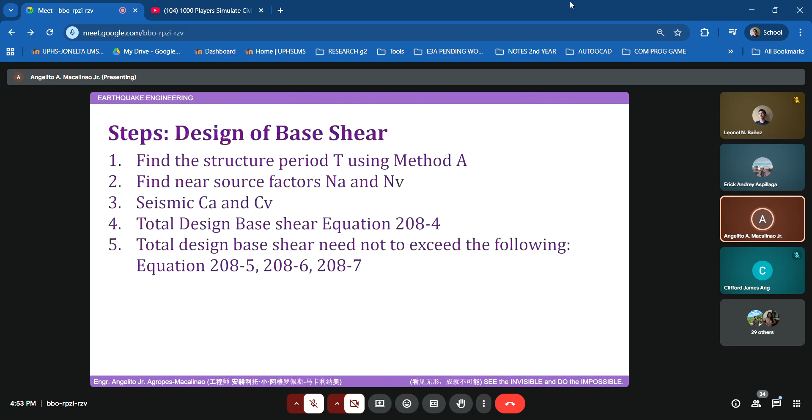Okay, thank you so much Mr. Aspilaga. So the value of NA, as established based on Table 208-5, is equivalent to 1.0.

And the value of Nv, according to Table 208-6 based on the interpretation, is 1.2. And the CA, referring to Table 208-7, is 0.44 times NA, which has a value of 1. So therefore the value of CA is 0.44.

Also, the value of CV in accordance with Table 208-8, based on the interpretation, is 0.64 multiplied by NV. Substituting the numerical values: 0.64 times 1.2, resulting in a final value of CV of 0.768.

Okay, another parameter we need to establish before assessing the lateral forces per floor is the numerical coefficient for period. You may refer to NSCP Table 208-11A.

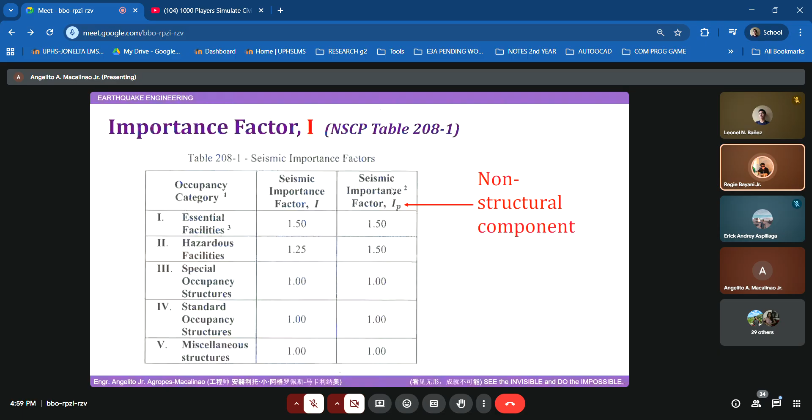And how about the other portion? Do we have any more 8.5 values? No, those are the only two. Okay, so please enlighten us which of those two will dictate the specific value of R.

It's category C, sir. Category C. So again, what's our basis? The special reinforced concrete moment frames, sir. That was given to us in the problem statement. Also, for the dual system, there's no data given to us about concrete shear walls, so we fall under category C, bullet 1, which is special reinforced concrete moment frames, with the value of R being 8.5. Thank you, Mr. Bayani. So the value is 8.5.

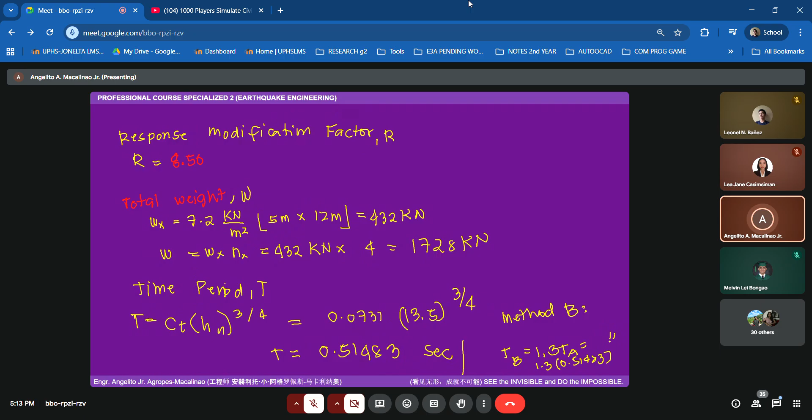Ano po, 0.6692828. Okay, so we have two method, di ba?

Based on the NSCP, method A, method B. Dito, nakakuha tayo class ng 0.51483, and then yung time B naman is simply equal sa 0.66928. Take note class, we are given the structure period, which is, ang value niya ay 1 second.

Ang ibig sabihin ng structure period, dapat i-compare mo siya sa method A and method B. So let's say for example, pipili ka ngayon from method A and method B, pipili ka ng mas malaki. So mas critical yon. Ang magiging pipiliin mo ngayon dito, use mo yung time B, which is 0.66928.

And then check mo ngayon siya doon sa binigay sa atin na structural period or time, which is equal sa 1 second. Dapat daw, pag yung napili mo na time, hindi daw siya dapat lalagpas sa 1 second. So therefore, ang pipiliin mo dito ay time B, which is equal sa 0.66928. Okay, so yan yung process.

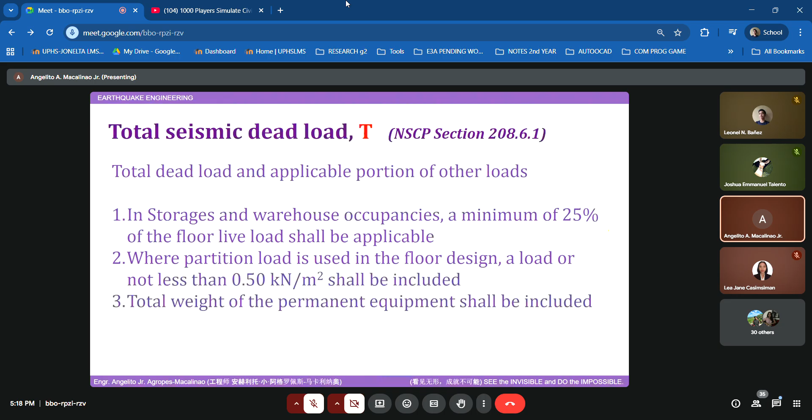Thank you. For this particular, take note that the given data natin is structure period. Ibig sabihin ng structure period, 1 second. At yung binabanggit natin o yung terminologies na binigay natin dito class, ang ginamit natin na term dito is elastic fundamental period.

So magkaiba ang elastic at saka yung structural period. Pag sinabing structural period, kung babasahin niyo yung book na binigay ko, it refers doon sa responses maximum. Kaya yung code, i-apply mo siya ngayon itong portion na to. Yung structural period, it refers to the maximum behavior ng structure na gagalaw siya based on the theory.

At saka i-apply yung code, dito na papasok si method A and method B. I am expecting kasi na iti-treat si method A kaagad. Hindi ko naman din naisip, ngayon ko lang din naisip na 1 second pala yung nagamit ng iba, kasi yung iba may gumamit na TA kaagad. Kaya sabi ko, yung TA is... hindi ko kasi tiningnan yung name nyo nung chinecheck ko kung sino yung mga gumamit ng 1 at saka gumamit ng TA.

So anyway, for the records, I will consider the time as 1 second, but also please take into consideration for the preliminary examination that the structural period refers to the maximum behavioral na magiging movement ng ating structure, theoretical, and then we need to check sa code kung yun ba ay papasa. Using the code, we have method A, which I presented and gave an example assessment during our lecture, which can be computed using this formula. Right after, yung challenge ko sana sa interim is to test yung method B, which hindi din pala siya talaga nangyari, parang naka-pattern buo doon sa example.

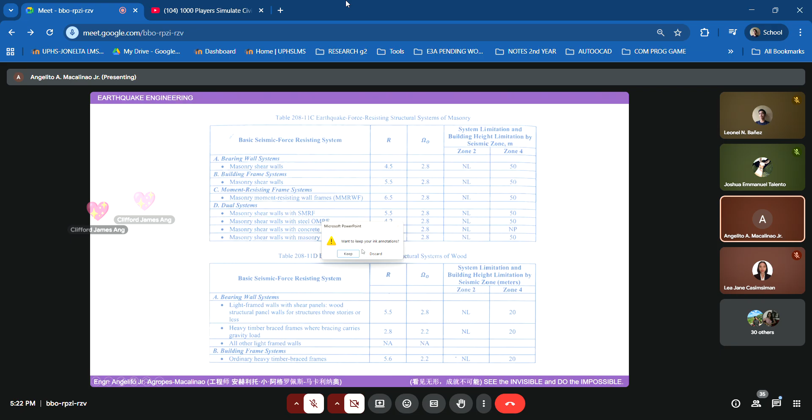So after nating ma-set yung time, na-set na natin yung time, pipili na tayo. Assuming na I will continue na lang yung lecture as na nakapili, moving on na tayo sa interim. I will consider the 1 second and then the TA. No worries for that, okay lang din naman sa akin yon. Now, proceed tayo as original ngayon.

So ngayon, may 1 second tayo na structural period, and then yung napili natin sa TA and then TB is 0.669. Kinumpare natin sa 1 second, mas malaki pa rin naman yung 1 second, hindi tayo nag-over. So therefore, yung magiging value ng T natin ngayon is 0.66928. Okay? So yan na yung mapipili natin ngayon na value ng T natin.

Okay, so the next consideration naman natin is kailangan na nating isolve yung value ng kanyang shear. So yung shear natin, we have also provision. Ilalagay ko lang ulit dito. So yung value ng V natin ngayon or shear natin ay referred dito sa 208.5. So tatlo yan, ngayon ang pipiliin lang o ang gagamitin lang natin para hindi ganun nakakomplikado ay yung Vmax and then Vmin.

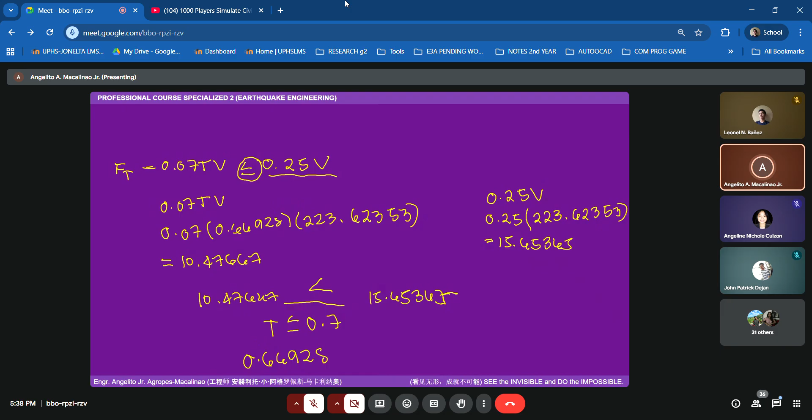So yung T natin, dapat tingnan natin kung masasatisfy na to, or equal daw siya sa 0.7. So yung T na ginamit natin ngayon dito is equal siya sa, asan na yun? 0.66928. Na-meet ba natin ito, Dejan? Yes po. Okay, kung na-meet natin ito, ano yung sinasabi ng code sa atin?

Ang magiging value daw ng ating FTI? Ilan? Yung magiging value ng FT natin? From the proof, pabalik sa calculated natin. So ano yung magiging value ng FT natin ngayon? Yung 10.47 po. Bakit? Kasi na-meet niya po yung condition.

Okay, ibabalik ko dito sa ating provision, para matuto magbasa ng mga provision. So kung na-meet natin yung FT, which is equal to 0.07 TV, which is dapat less than siya sa 0.25, na-satisfy natin, yes. Yung T din natin is 0.66928 something, and na-meet din yung condition ng 0.70. Okay, so uulitin ko yung tanong, ano yung magiging value dapat ng FT based on the readings on the code?

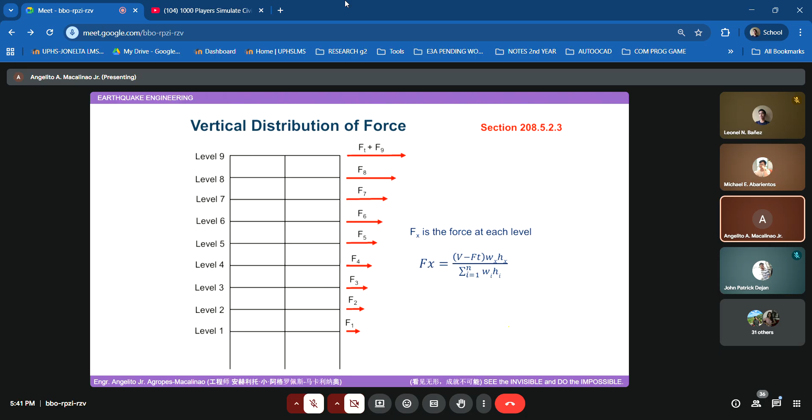Sa rinig po, naririnig naman po, may concern lang po ako. Sige. Yung dun po sa final slides niyo po, pwedeng pabalik po.

Ito? Opo. Yung tama naman po, na-meet naman po yung condition. Yung sa lang po, mali po yata yung computation po, dun po sa 0.25 times yung V po. Dapat po kasi po yun,

55.90588 po. 55. Okay, 55. Ito yung, sorry. So, ang mako-correct ay ito, magiging 55, wait lang, nakalimutan ko. 55, wait. 90588 po. 90588, ganyan. Opo, sir.

Pa-double check nyo na lang kasi ako is wala ngayon dito correction na dala-dala. And even dito, kanina din, ang dami nilang correction dito. So, please double check nyo na lang siya, kasi on the spot din ako nagsosolve.

So, ilagay ko lang tong table form para mas mabilis tayo mag-establish. Okay, so let us begin to establish now, no?

So, meron tayong 4 na layer. So, sabi natin, ni-label natin na roof deck. Ito naman pag label class, it's up to you kung level 1, 2, 3, 4, okay lang yan. Basta yung figure is magigets ko siya, okay na ako doon. Okay? So, roof deck.

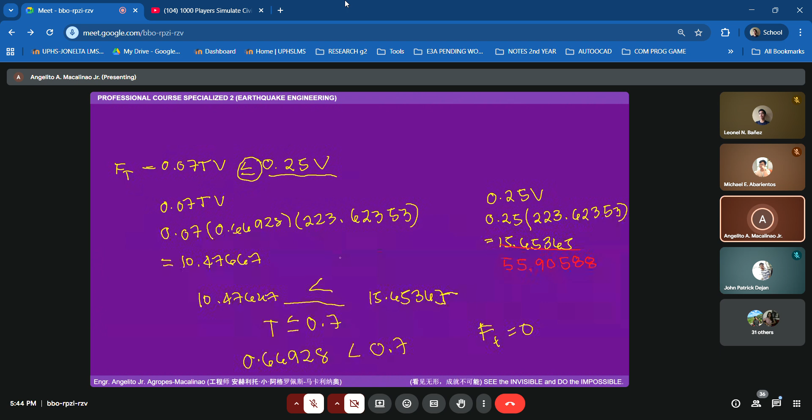Tapos kasunod dito, i-drawing ko na lang din. So dito naman, ma-minus mo lang yung 3 again, magiging 10.5 tayo. Tapos itong level naman na to class, ma-minus mo ulit yung 3, so magiging 7.5. Tapos ito naman is magiging 4.5. Okay, so yan yung mga dimension natin. Idadala ko lang ulit sa table natin: 13.5, tapos 10.5, tapos 7.5, and then 4.5. Okay, and then yung WX naman natin, kung babalikan natin yung problem, yan yung weight per structure.

7.2, tapos yung dimension natin, 5 taka 12. Kaya ako pinasegregate kanina para itong 432, ito yung per floor niya. Okay, so therefore yung 432 na to, ito ngayon yung gagamitin o i-input natin dito na WX. So ito ngayon ay magiging 432, 432, 432, and then 432.

Okay, i-multiply na lang natin to class yung WX and then X, yung values dito ipaki-multiply po dito isa-isa. So saan tayo nagtapos, kay Dejan no? Dolleton, pa-provide naman po noong WX, HX, from roof deck to second floor. Sir, 432 po yung WX. 432. Okay, so please use 432 on your calculation. Okay, so proceed.

5,832. Sa roof deck ba to? Yes po sir, roof deck po. So 5,832. Sakto? Yes po. Okay, so next sa fourth floor. 4,536 po. And then sa third floor, 3,240. And then yung second floor, 1,944.

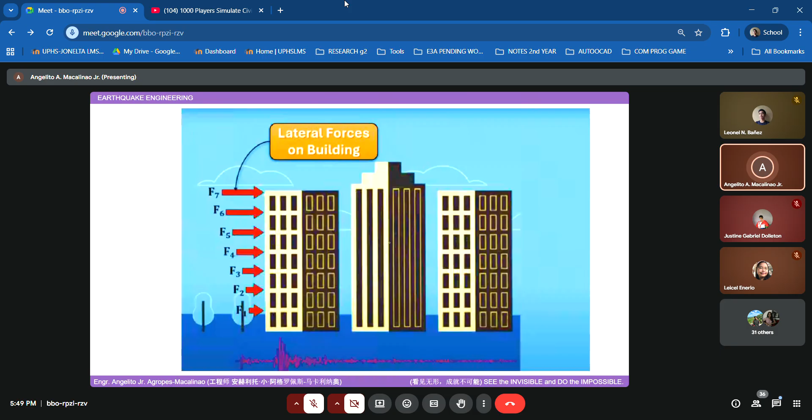So next is calculate natin yung value ng fx. Yung value class ng fx, nasa saan yung fx natin? Yung equivalent value ng ating fx ay eto. Okay, so yung value ng fx natin can be calculated using the V kung ano yung napili natin, and then ft. Tapos yung nasa top floor, ipa-plus lang natin yung value ng ft. So since 0 tayo, hindi na tayo mag-plus for this particular. Okay, i-rewrite ko na lang siya dito. Tapos susundan ninyo kung sino man yung maa-assign na magka-calculate.

So again, yung value ng V natin ay equal sa... yung value ng V natin ay equal sa 223.62353. Sound check. And then yung value naman ng ating ft natin is equals to 0. So yung formula ng fx is simply equal dun sa V minus ft, and then WX HX, tapos yung summation natin ng WI HI. Okay, so pa-compute naman na po tayo.

So actually, kung na-calculate na pala natin ito, i-multiply nyo na lang yung V. Okay, so sino ba na tayo? Kanino na tayo? Enerio Fajardo, so pakibigay naman sa atin yung value from the roof deck up to the second floor. From roof deck po, roof deck. Okay, so for a while muna. Okay, sige, proceed. Sa roof deck po, 83.85, 882.

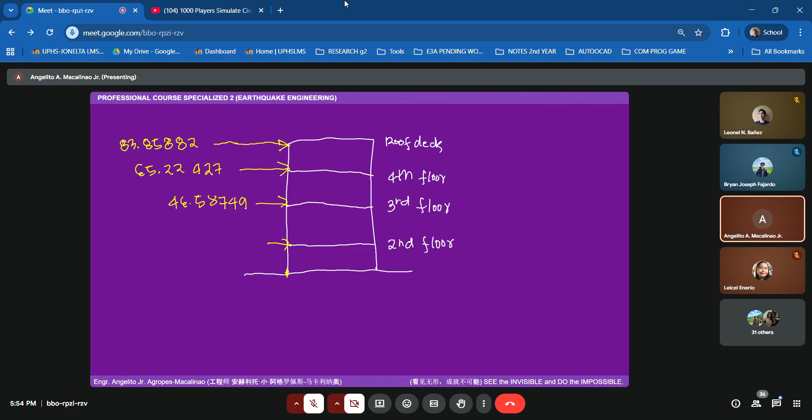So yung values natin sa taas is 83.85, and then 882. Next is 65.22, 427. Next is 46.58, and then 749. Next is 27.95 and then 294.

Okay, so that is now the final answer on the first data na hinihingi, the first requirement na hinihingi sa atin ng design, which is the seismic lateral force per story.

The next is the moment daw at the base of the footing. So pag sinabi naman nating moment, so yung nandito sa portion na to, sabihin natin yung nandito tayo. Okay, it's either dito or dito, so dito na lang natin kunin. So meron daw tayo ditong moment. Kung ito i-consider natin na point A, let's say this one is point B, and this one is point C, point D, sabihin natin ito yung point O natin. Okay, so meron tayo ditong moment O. Okay, so yan yung base ng building natin. At take note also na yung ating dimension

is 4.5, tapos meron tayo na 3, 3, tsaka 3. So kung magsasummation tayo class ng moment at point O, denote positive clockwise. So yung value ngayon ng 83 natin, kung palalakarin natin si 83, papunta siya ngayon kay point O. So ibig sabihin, yung moment natin ngayon ay meron tayong forces na 83.8588 and then yung moment arm natin, yung buo, so that is 13.5 plus

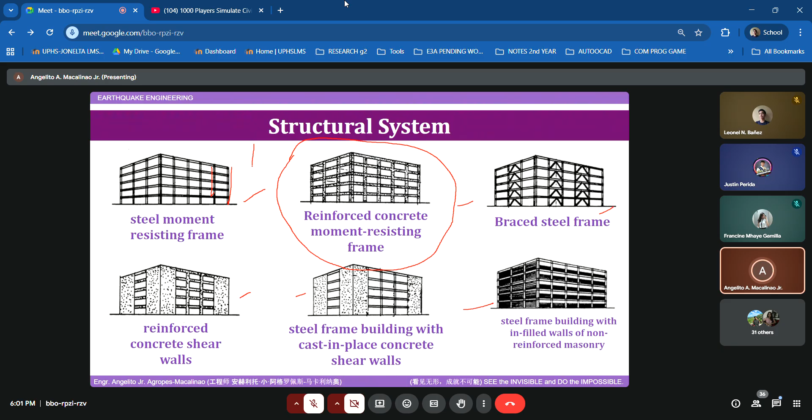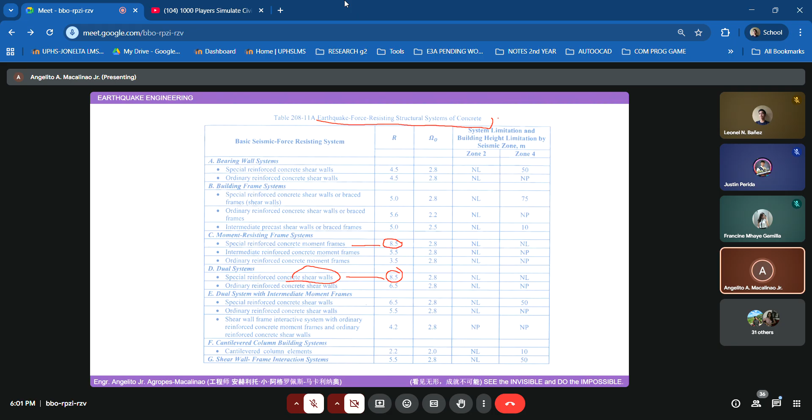So dito sa dalawa, kaya lang ito kasi clearly naman stated na dapat daw yung shear niya is may shear wall. So ibig sabihin, kung ito naman yon, dito kayo pupunta. Eto, asan yung may kon natin? May mga dual system, yung katulad na to. So naka-provide sa inyo, so ito yung magiging basic elements ng configuration. Sa atin, eto lang tayo sa problem, ganito lang yung itsura niya. Based on my understanding, please correct me if may mali sa aking pagkakaunawa. Ayan, so dito nyo titingnan. Itong mga figure na to, mahalaga ito kasi dito kayo magbe-base kung ano yung ma-establish na system, framing system. Sa ngayon kasi ganito pa lang yung binibigay ko, hindi pa naman ako nagbibigay ng mga leveling, yung may mga nakaganyan-ganyan. Okay, so nasagot ko ba yung iyong query kung bakit tayo ay ginamit natin is 8.5 because of the materials of or the whole system is made up of concrete. So hindi po pwedeng magamit yung 208-11B because that is intended for steel.

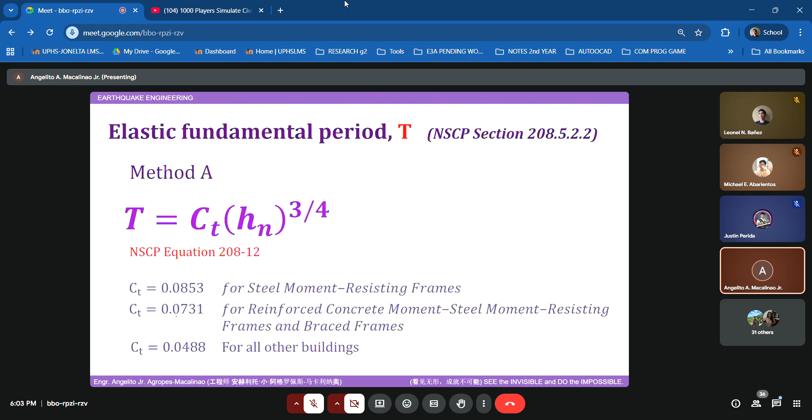Kung kukunin natin yan, sige, let us try to apply this portion, tingnan nyo lang ano yung magiging varying. Kasi ang most critical dyan talaga yung Vmax at saka yung actual V based on experience. So sige, let us try to apply the other Vmin, but on my end, kahit isa lang itong gamitin, okay na ako dito. Ngayon, itong portion ng equation 208-10 is general, can be used using Z is equal to 0.2 and also can be used using 0.4.

Kasi meron siyang pinaka-resistance, ibig sabihin lang, kung yung values, tatlo yan, isang V, isang Vmax, tsaka isang Vmin. So from that three conditions, kailangan yung V na to ay masasatisfy niya ito tsaka ito. Yung sample natin kanina, na-satisfy naman, yung Vmax lang yung hindi, kaya ang napili natin Vmax. Ang next step, Abarientos, is...

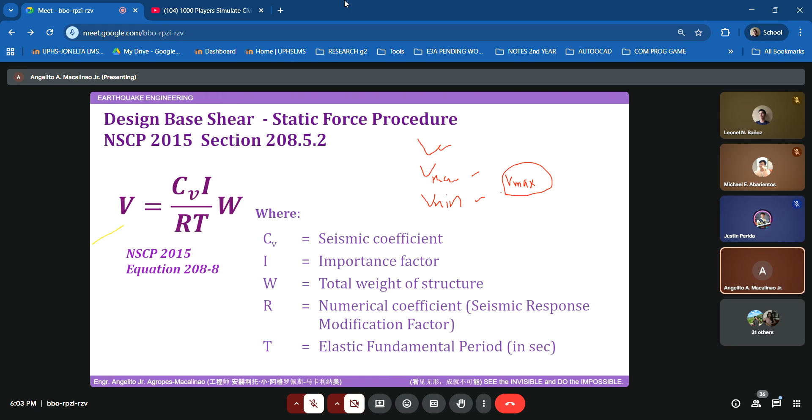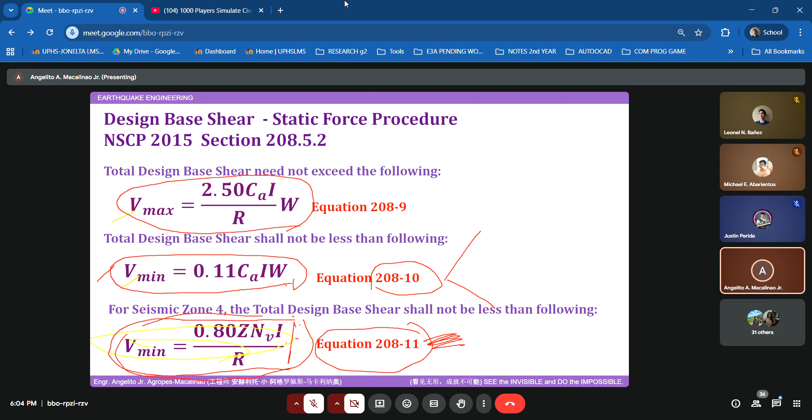Yung Vmax na napili mo, i-compare mo siya ngayon dito sa Vmin na sinasabi dito, kung siya ay naka-zone 4. Kung naka-zone 4 tayo, dapat daw hindi tayo bababa dito. Kaya lang sabi ko nga, around 10% difference lang siya. Pero kung i-compare natin, gamitin natin, for the purpose of doubt, para maalis yung ating doubt.

Gamitin natin siya, idala ko lang doon sa calculation wherein present yung ating V. Ida-double check natin, dapat itong napili natin na to, dapat hindi siya dun magiging less than sa nakuha, which is 0.80 Z N V I natin over R. Kung i-substitute natin siya, 0.80, yung Z natin is 0.4, ang NV natin ilan? 1.2, so 1.2. Tapos yung I natin is 1, tapos i-divide natin siya by 8.5.

So Abarientos, paki-compute nga po ilan yung lalabas sa atin.

Rinig po, sir. Ano po? 78.06494. So ibig sabihin, class, is safe pa rin itong napili natin. Okay, so yun yung interpretation don, Abarientos. Thank you po, sir.

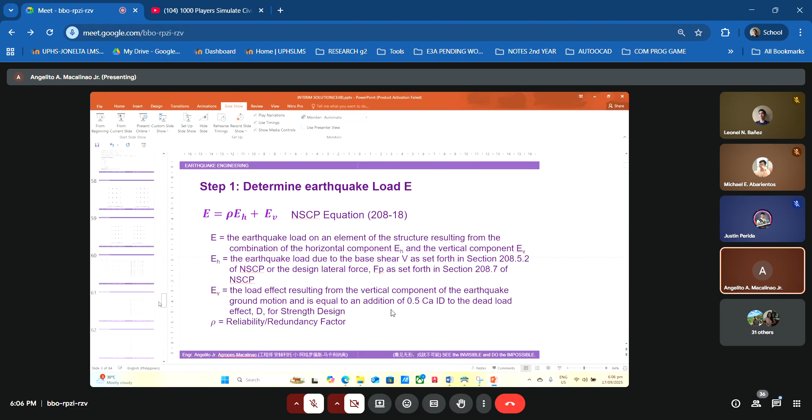So the problem statement number 2, we are given the seismic source type, that is type B, yung zone natin is 4, and then yung nearest fault line natin is 3.5 kilometer. So for this particular problem, we are required to determine the value of CV, CA, NA, and NV. At the same time, yung geotechnical data, daily drilling logs in particular, are also provided. On the daily drilling logs, given dito yung depth, yung coring natin, given din yung number of blows, and then the equivalent N values, and also if it is SPT or core recovery.

So para makuha yon, ginagamit natin yung Atace 2019, which is sabi natin yung value ng VS for clay soil is 47.64 and N160, i-raise natin sa 0.617. To start the calculation, it is suggested na establish muna natin yung kanyang depth versus dun sa kanyang number of blows.

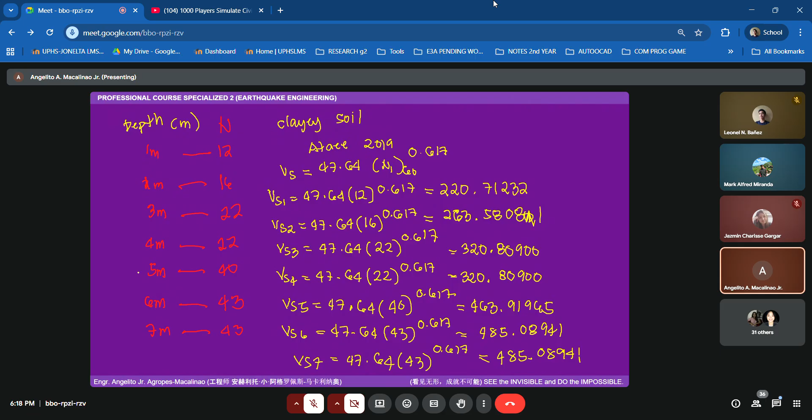Okay, picturean ko lang muna yung mga values. So this is slide. Sir, nasolve mo na kaagad? Wait lang, sulat ka yung DI muna. Yung sa pangalawa, VS2, may correction? 0.58081 po ata. Opo, 081, ganyan. Yan, baka ako mamali. Kala ko na-solve mo, nasulat ko muna. Okay, picturean mo na din, na-picturean mo ba para kung i-advance mo. Opo, so simulan mo na dito. Sound check.

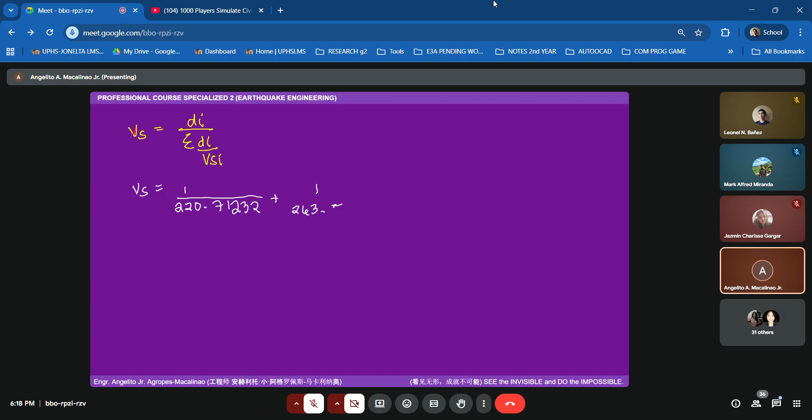So yung VS natin is equal now to, please allow me. Unahin ko lang yung ibaba. So meron kang 1 over 220.71,232 plus 1 over 263.58081 plus 320.80900 and then 1 plus same lang 320.80900 and then plus 463.91965, 1 plus 485.08941 and then 1 plus 485.08941 and then 1. And then over natin lahat yan by 7.

So ilan yung magiging values natin ng VS, Mr. Miranda? 335.935? Point... 934, 04. So, meter per seconds.

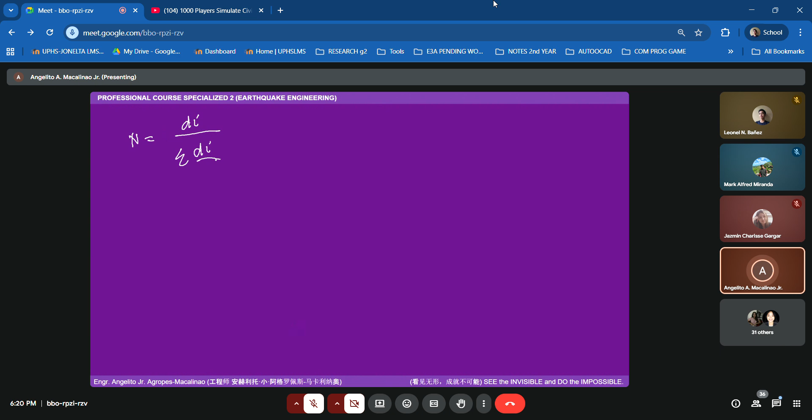Okay, so next naman yung value ng N natin. So sabi natin yung N ay equals to DI over summation of DI over NI. Substitute din natin yung values. Unahin ko lang ulit yung ilalim. So 1 over 12 plus 1 over 16 and then plus 1 over 22 plus 1 over 22 plus 1 over 40 plus 1 over 43 plus 1 over 43, and then yung numerator natin, value niya is 7 in total. So ilan yung N natin again, Mr. Miranda? 22, point 708, 54, or simply yung N natin is 23.

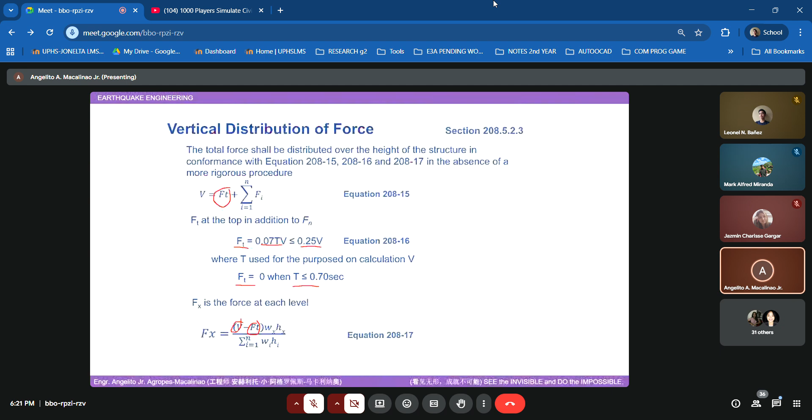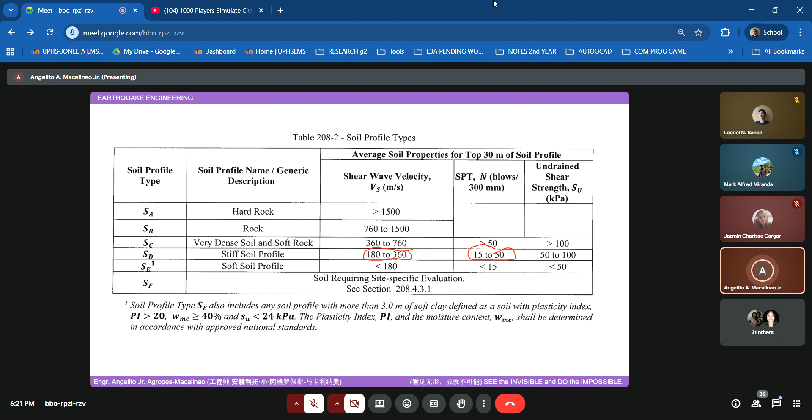Okay, so with given tayo ng N na 23 at saka 335, yung VS natin, puntahan natin yung provision sa NSCP para maklasify natin kung anong type siya ng soil. So from the given data, ano yung meron sa atin? Una, yung value ng ating N is in between na to, kasi 15 to 50. Tapos 300, ilan ba tayo? 330 something, so nandito pa rin siya sa limit na to. So therefore, yung classification natin ay SD. 23 tsaka 335, so therefore yung ating soil ay SD.

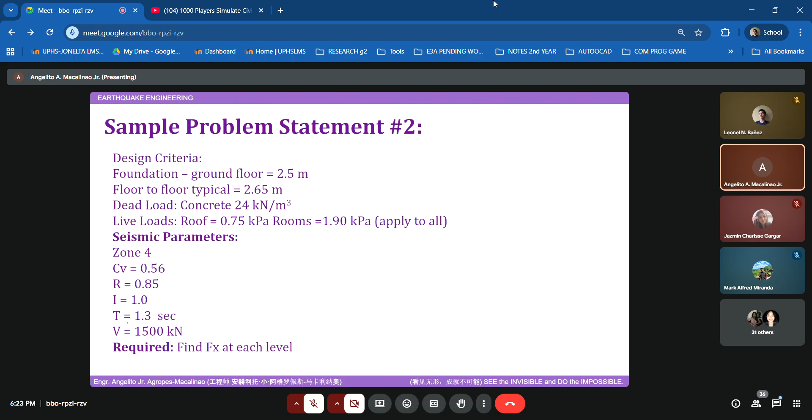Okay, so kanino tayo nagtapos? Kay Miss Gargar, no, Grimaldo. Miss Grimaldo, what is the value of NA natin ngayon based on the available data na meron tayo? Wala ba si Miss Grimaldo? Si kwan na lang, hugot ako dito kay Ortega.

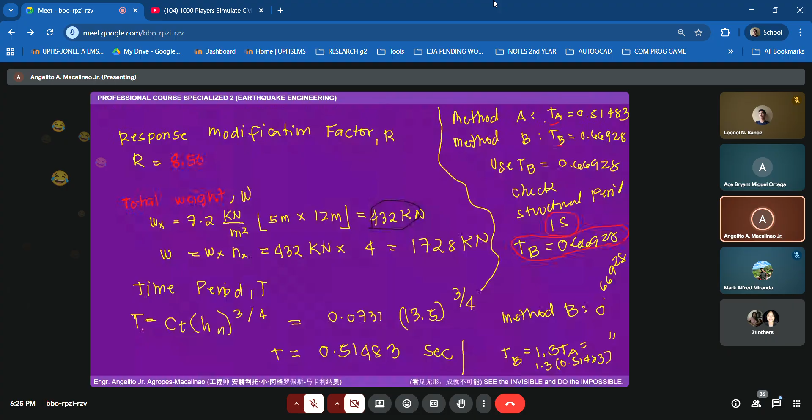Nako, Ortega, sir patayin nga po ulit ng ano, ang layo. Yes. Picturean mo muna para alam mo yung isasagot sa akin. Ayan, so given tayo na yan, yung mga parameter. Tapos SD yung isa. Wait lang, sir, picturean mo, tapos interpret natin. Ayun, size okay, so source type B. Ibig sabihin, hindi ka pa ready sa prelim, di ba? Kaya kung kayo ni-review bigla eh. My bad, sir, okay lang. So eto na, start ulit tayo sa... ay sorry, lumagpas ako.

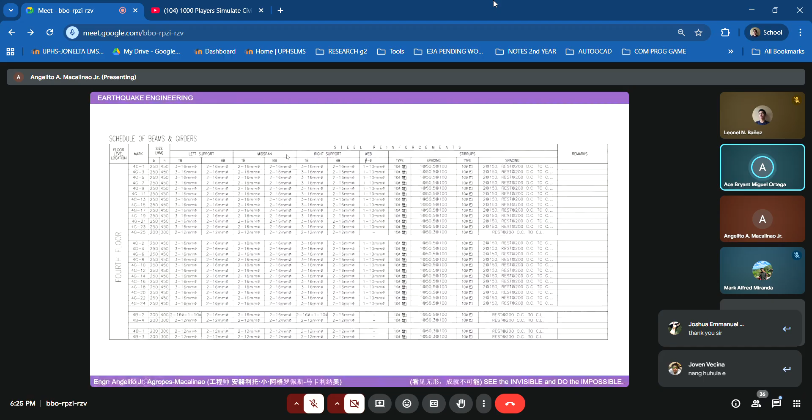Okay, so yung NA, ano yung value ng NA natin? Siya po ay, bakit siya 1? Siya po ay seismic source type B and under po siya ng 3.5 kilometers, sir, kaya siya nakapumasok ng 5 kilometers po. Okay sige.

Okay, so correct. So how about the NV? Ang NV naman po ay seismic source type B and bumase po ako sa 5 kilometer which is 1.2.

Kasi po 3.5 yung distance po, near seismic distance po. Okay, so hindi siya pwedeng gamitin na less than 2, no? So yung 5 yung pinakamalapit. So dito, hindi naman tayo nagko-correlation kasi.

Okay, so 1.2 is okay for the value of NV. Next, pa-provide naman yung value ng CA. Ang CA naman po is SD, zone 4. Okay, so 0.44 ni NA. So anong ibig sabihin ng 0.44 ni NA kapag nilagay natin si NA? So ilan yung magiging value ng CA natin ngayon? Siya ay 0.44 pa din, sir.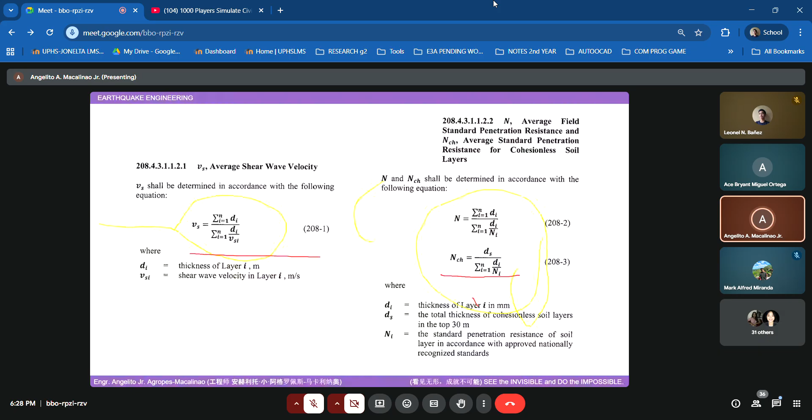Okay, so next is the CV. Sa CV naman po, since SD ulit and zone 4, siya po ay 0.64 ni NV which is 0.768 po. Kasi 0.64 times sa 1.2, 0.768. Tama ba? Opo. Okay, so that's all, di ba? So i-summarize lang natin yung mga nakuha natin ngayon para meron tayong final answer.

So yung required sa atin is yung NA, NV, tapos CA, and then CV. So in accordance with the Ortega's assessment, the value of NA is 1.0, the value of NB is 1.2, the value of CA is 0.44 NA, which is equal sa 0.44.

Sir, hindi po ba dun mag-i-interpolate? Kasi parang may nakalagay po dun sa code na magagamit daw ng interpolation. Hindi naman siya. Sige, interpret natin kasi hindi kami diyan nag-i-interpolate. Okay, tapusin ko lang muna to para pumasok tayo talaga sa dialogue.

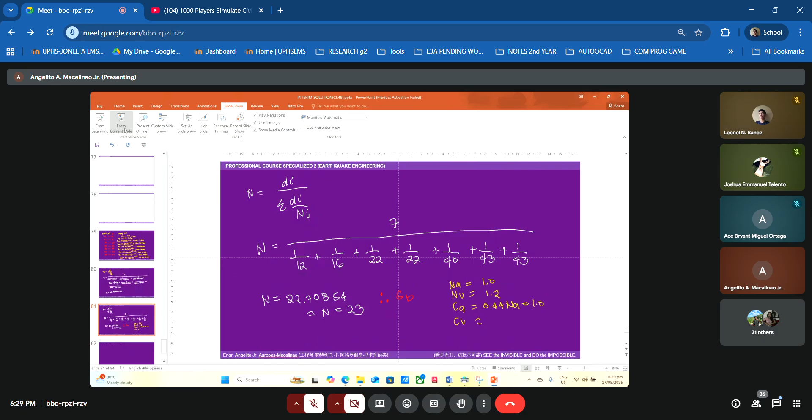So ang magiging value ng CV natin ngayon ay 0.64 NV, so which is equal siya sa 0.768. Okay, so in overall, ito yung magiging value ng CV natin. Okay, so now puntahan natin yung dialogue.

Start na natin. Yes, please. Yung value po ng CA is 0.44 po siya. 0.44. Sorry. Opo. 0.44. Okay, so tapos puntahan natin, additional po lang.

Ang final value ko po kasi sa CV, 2 decimal places po. Ginawa ko po 0.77 po, yung CV po. Di ba po 0.768 po yun? Opo. Okay lang po ba na naka 77 lang, sir? Yun po kasi, hindi ko patanda yung instruction pero alam ko dapat 5 decimal lagi eh.

Okay po, siguro sabihin natin in interim sige. Pero in prelim dapat susundin talaga yung mga tawag dito sa instruction, babasahing mabuti. Okay? Thank you, sir.

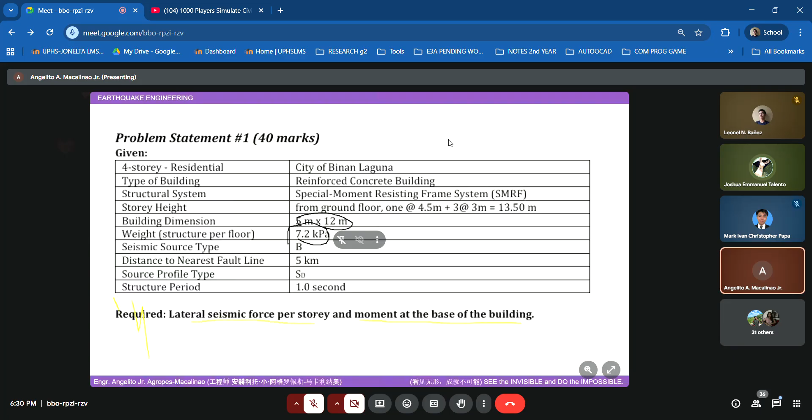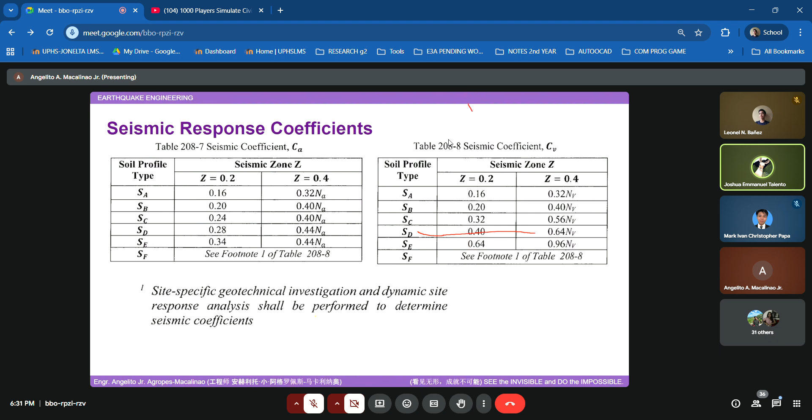So puntahan natin yung ni talento. Nasa saan yun? Sir, sabi po dun sa table sa ibaba. Usod pa po, sir. Ayan po. Sabi sir, may be based on the linear interpolation of values per distance other than those shown in the table. Dun sa NA po, sir, hindi na po kami nag-interpolate since naka-indicate naman po yung less than or equal to 5, ganon sir.

So parang pasok pa rin siya yung 3.5 km. Pero dun sa NV, since nakita po namin na wala pong nakalagay na less than or equal, ganyan, kaya dun po kami nag-interpolate sa NV lang naman, sir. Nag-interpolate kami between 2 tas 5. Ang nakuha po namin, 1.4.

Okay lang naman, sige, I will consider that. Thank you, sir. Hindi naman ganun kalaki. Siguro gawin na lang natin para pare-parehas, no? Kasi ang mangyayari, marami akong gagawing solution, di ba? Oo nga, para po eh. Anyway, so ganito na lang, pag-usapan natin.

Ilalagay ko na lang sa instruction, siguro dun, ulitin ko na lang pala yung questionnaire ko ng prelim. I-state ko na lang yung mga provision na kailangan kong i-meet para isang tito correction na lang ako. So again, for that query, I will accept the interpolation for the interim solution only. Okay, so on preliminary, iisa-isahin ko na ngayon yung instruction para mabasa na lang siya.

Okay ba yun? Thank you sir. Parang okay, pag ganon, so sir, pag yung 3.5, doon na kami papasok sa 1.2. Okay po sir, supposed to be kasi maliit lang naman yung distances kaya binigay ng ganyan. Normally nagkakatalo kasi yan kapag 10, kapag yung less than talaga maliit, no? Pero pagka i-input mo din yan sa STAAD niya, i-round niya din kasi diyan eh.

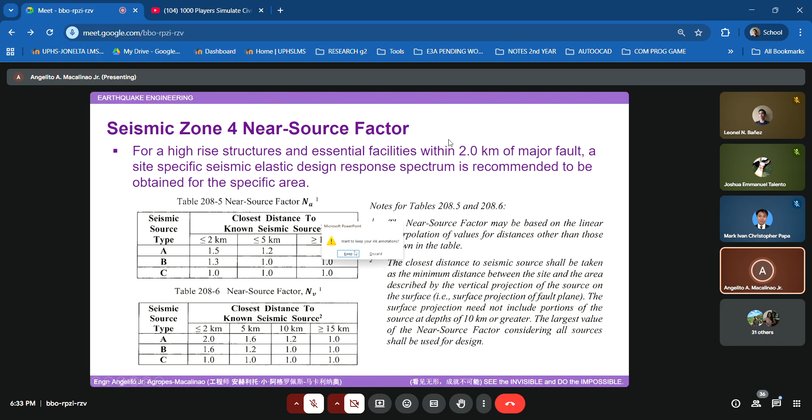Sir, tatanong ko lang po, yung dun sa depth, hanggang 7 meters po di ba, bakit po yung ginamit na formula dun sa VS is 47.64 N raised to 0.617? Yung nandun po sa example niyo last time, ang ginamit po dun yung sa sandy soil, kaya yun po yung ginamit dun sa pinaka last na depth, yung VS is equal to 69.18 times n raised to 0.506 po.

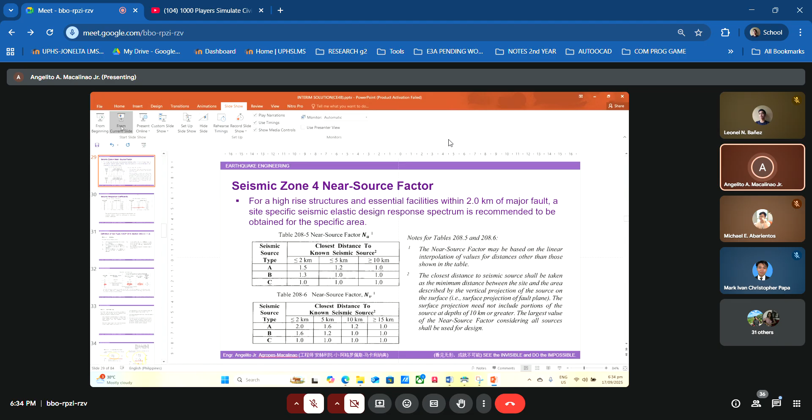Okay, I think nag-announce ako during the examination, no? Pero balikan ko lang yung explanation ko during that time. So if I remember, during the examination natin ng interim, may lumapit din sa akin, I forgot kung si Ang ba yun or basta merong lumapit, from the other room.

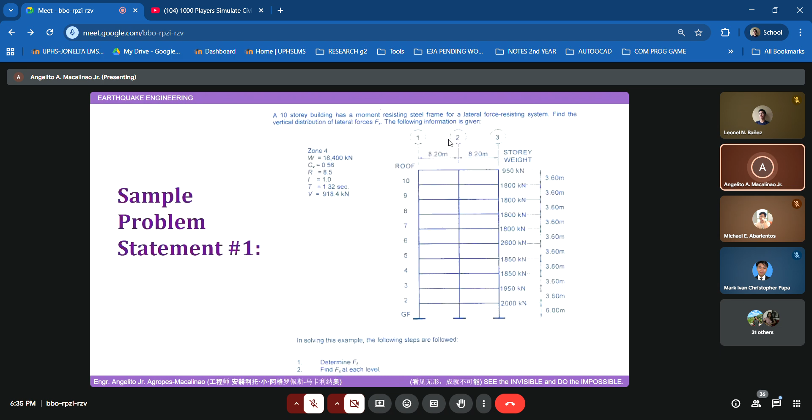So through visual inspection, ASTM D2488, you can identify if it is clay soil or sandy soil depending on the N values niya. So with that, may lumapit ulit sa akin sa room na binabantayan ko, hindi makuha, so sabi ko, sige, we will use the CA. So yung last, kaya siya Abarientos merong sandy kasi naka-reflect doon sa boring logs, daily logs natin, dito siya makikita, dito yung nakalagay yung mga datas natin, kung anong klase yung soil classification na mapoproduce ninyo.

Okay, so try to look at these photos and then to other diagram, and then I will open the interim, yung example, andito rin pala, bakit ko ba inalis ko pa dito? Nandito rin pala yan, ikinapit ko nga pala dito.

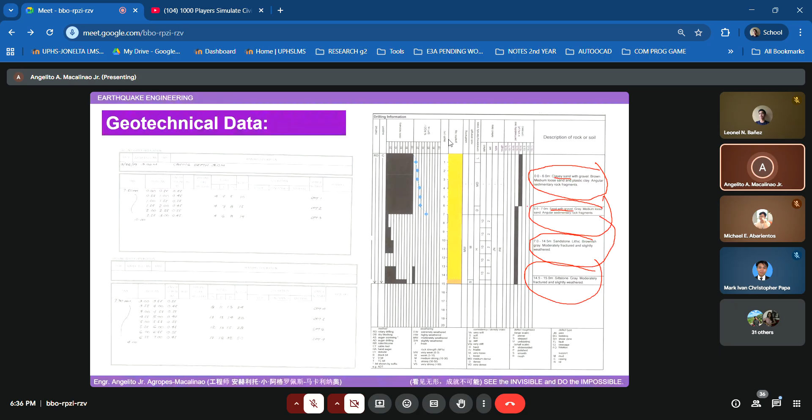So dito makikita natin yung portion ng logs natin. Ito, identify kasi siya dito kung ano yung values. So kaya yung last part, kung mapapansin niyo, yung up to 7 ba tayo kumuha doon? Yeah, up to 7, yung last portion ay naka-identify dito, sand with gravel, so yung main component ay sandy soil. Kaya naman yung from 0 to 6 meter, yan ay classified na clayey soil. So that is one example.

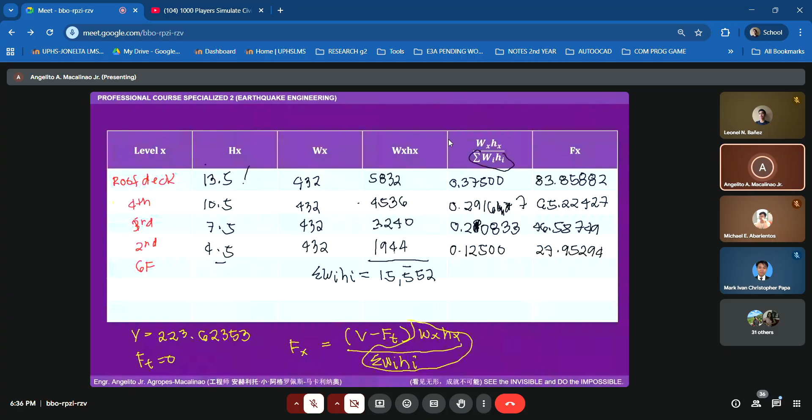Now, in regards to the interim assessment, ang nandito ngayon ay wala naman akong pinrovide kasi nga challenge sana siya, pero hindi naman pala pwedeng maging challenge, i-given ko na lang ulit. Okay? Kaya nga assessment sana, so anyway, hindi ko binigay yung provided dito para sana mag-interpret dito.

Okay, yun yung reason kaya ko binigay before, sinabi ko during the exam na gamitin yung clay soil. Hindi ko alam kung hindi niyo narinig, but pumunta ako sa room and then doon sa iba, kaya siya naka-clay soil lahat. So yun yung reason diyan, yung may explanation ko kung bakit hindi sandy yung nakalagay sa dulo ng portion. Okay po sir, thank you po.

Okay. So other queries, questions related to the problem or other queries na pwede pang ma-encounter? Challenge accepted, what does it mean? Basahin niyo lang yung libro, yung binigay kong libro, para ma-interpret niyo yung ibang mga wordings.